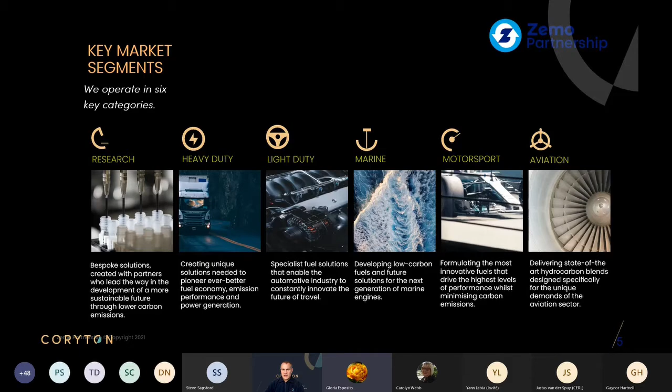So why we're here today? We're looking at understanding how the industry can cope with the move away from fossil fuels into a more sustainable future. There are a number of pathways to sustainable fuels that Coryton has been looking at, and indeed a lot of the rest of the industry has been looking at as well. These transition from typical biofuels that are very common in road fuels today, such as FAMEs, or rapeseed and soya and diesel, and alcohols such as ethanol. There are methanol fuels available in certain markets as well. But what we're looking to do is push the boundaries of what we can achieve within the market, because alcohol-based fuels, FAME-based fuels are not considered to be drop-in fuels. And they also give us little scope for improving or utilising other feedstocks to help complement the liquid fuels that are in the market and to decarbonise them.

With that, we've been looking at a number of different technologies, and specifically we've been looking at ethanol to gasoline technologies and methanol to gasoline technologies. The screen that you can see now gives you a bit of an indication of where they sit within the mix of different fuel types that are available. If we go back to typical FAMEs and ethanols, these are sitting down in the typical biofuel stream. As we move further up the scale, we go into a more advanced biofuel route, all the way through to e-fuels. And out of those, what we're looking to achieve is to actually change the structure of the feedstocks to one that is more common and one that can be considered to be a true drop-in fuel. Can we go to the next slide, please?

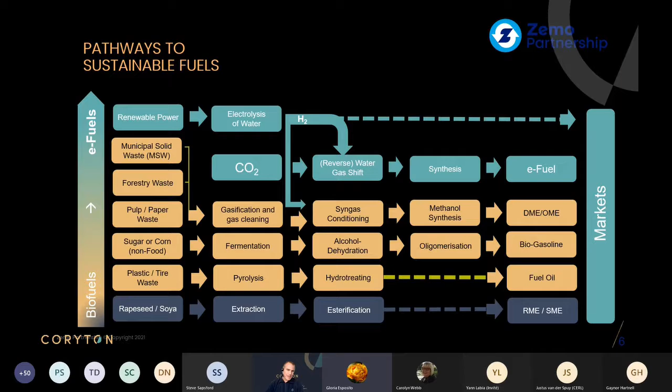So as I said, there's a number of technologies that we've been looking at. We can break these down over sort of the gasoline and diesel ranges. I'm obviously going to concentrate on gasoline, but we've got biogasoline from the ethanol to gasoline process.

We've seen this as being particularly viable at the moment. There is a particularly large capability within the market of supply, and it's also relatively energy efficient - the process involved doesn't form a lot of energy, it doesn't require a lot of energy to run it, and I'll go on to that in a moment.

We've also got biogasoline from the methanol to gasoline process, and you will have heard this within the industry for a number of years - a technology that was designed by ExxonMobil. Again, it has a very similar sort of technology to ethanol to gasoline in terms of its process, although the technicalities behind that are very much different, and they do produce very different types of fuels.

Obviously, going through, we've got biogasolines or biojets. These can be sort of produced from pyrolysis fuels. Again, these are only in an R&D stage, and obviously we've got the power to chemicals.

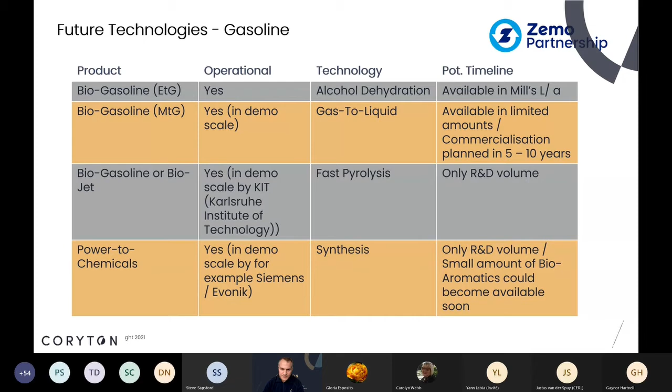Now there's a bit of a mix here with the biogasoline on the MTG route, because these MTG fuels are normally considered to be a true definition of what an e-fuel is - i.e. it's a fuel that is produced using carbon dioxide, hydrogen and renewable electricity to power the first part of the process there. Can we just go on to the next slide, please?

There is obviously diesels as well, typical HVOs that are in large-scale production at the moment. There are other advanced biodiesels that we've been working on, and you've got these sort of circular economy fuels as well, which are utilising wastes such as maybe municipal wastes from plastics, from rubbers. These are a lot more energy intensive, and there is also a discussion around how they sit within the matrix of looking at their sustainable credentials.

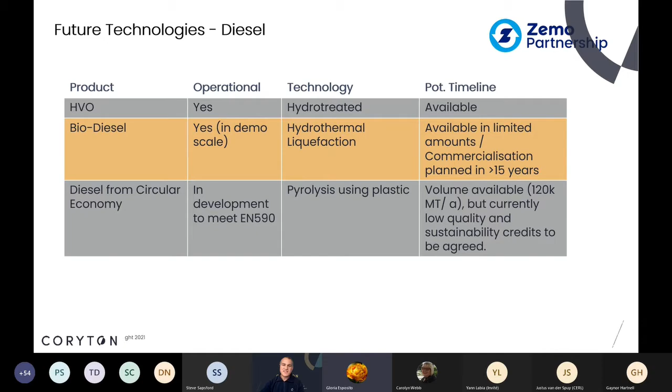So if we can just go on to the next slide, please. Just to give you some of the examples of some gasoline products that we've been looking at recently for a number of different applications - we've sort of been concentrating on typical retail type fuels, but also motorsport fuels as well, and looking to help bring the market, or bring those into a market where they can be tested and effectively sort of signed off.

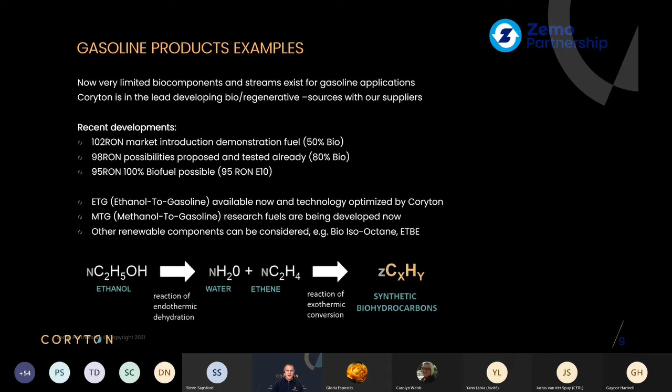The idea being is that we really want to have a look at understanding, are they really a true drop-in fuel, or are they something that's more aligned to a biofuel that we've seen in the past. So we just go on to the next slide, please.

So just to talk to you around the ethanol to gasoline process specifically that we're looking into. The main process here that we want to get to is obviously we're looking to convert biomass into ethanol. And in this particular scenario, looking at ETG, we're wanting to utilise second generation ethanol. These can be utilising feedstocks such as forestry waste, agricultural residues or straws, and these will go through a very typical hydrolysis and fermentation process using the various catalysts and enzymes, as you would normally to produce any other alcohol.

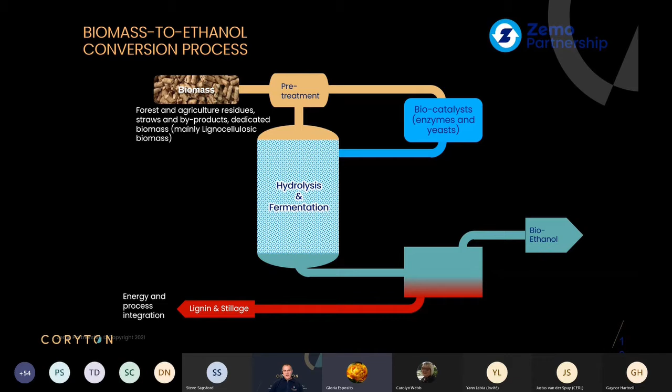If you can just go on to the next slide. When the ethanol is eventually produced, it's then going into these proprietary technologies, the actual ethanol to gasoline conversion technologies. Now, ethanol to gasoline technology, the good thing about this process is that it produces an exothermic reaction, and this in itself helps to power the entire process through.

And what you're looking to do is split off the water and hydrogen molecules, and you're producing a syngas that's being put back in, that's being reformed again, and then it's going through to a final distillation process.

Much like what we see within the fossil industry, there are offcuts of the refining processes that you need to think of and find homes for. And that's a good thing, because it means we can utilise these offcuts or other fractions in other industries, whether it's carrier fluids where additives are used.

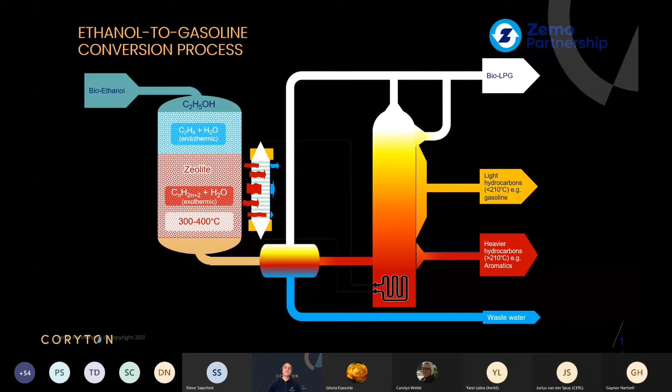So ethanol to gasoline is not the only process we've looked at and worked with various industries. You've also got biomethanol to gasoline.

The methanol stage of this is really where you're terming the e-fuel stage, because you're taking CO2 out of the atmosphere and combining it with hydrogen to form a biomethanol. Again, much like the ethanol to gasoline process, this is going back into a process using a zeolite catalyst.

But the technologies and the heats used, and the process sitting behind this, produce a very different type of product for us. It's actually a much lighter gasoline, boiling in the sort of 250 to 300 degrees C range.

But likewise, then going through into a distillation column, where we can cut off the various different types of products. We found that through this process, we're actually getting cuts that are a lot lighter, with a lot less aromatics, giving us fuels that are potentially much more usable in the future.

Now, the problem with these processes, particularly the methanol to gasoline process, is that it's quite an energy intensive process right at the beginning stage. Although the latter stage, much like the ethanol to gasoline process, is exothermic and therefore producing a lot of its own energy to power the process, the beginning stage to produce the biomethanol does require external energy, and ideally that should be a renewable source.

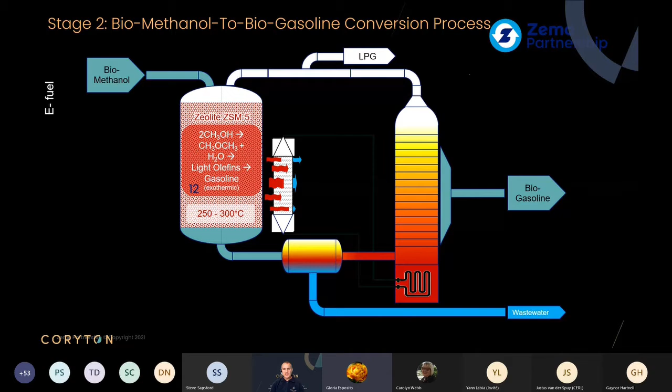There are facilities around the globe that are taking CO2, or carbon capture, whether from atmosphere or direct feed from industry, and powering these processes through hydro, wind or solar to produce this biomethanol. At that stage, we can consider them to be a true e-fuel with very good greenhouse gas savings.

Coryton has produced a number of fuels because we've wanted to look at these fuels in real world applications as well as on the test benches. We've also done our own fleet studies utilising our own staff vehicles. As you can see from the slide, we've looked at trying to concentrate on

EN228, or typically EN228 type fuels, to understand what does that mean, what does it give us in terms of its greenhouse gas savings, because that's ultimately what we're trying to achieve here. As you can see, with these types of fuels, you can achieve up to and beyond 80% greenhouse gas savings based on the RED II directive.

This is utilising a mix of the biogasolines, but also the straight alcohol contents as well. That can increase as you move from an E5 all the way up to an E10, which is quite pertinent, bearing in mind EN228, certainly in the UK, is going to move to an E10 from September onwards.

So what are the advantages and disadvantages of these types of fuels? Well, firstly, it's a true drop-in fuel. Looking at the characteristics of these fuels, one thing that we wanted to move or educate the industry on from these technologies is that they are not alcohols in their own right. They're not alcohols as you're used to seeing them.

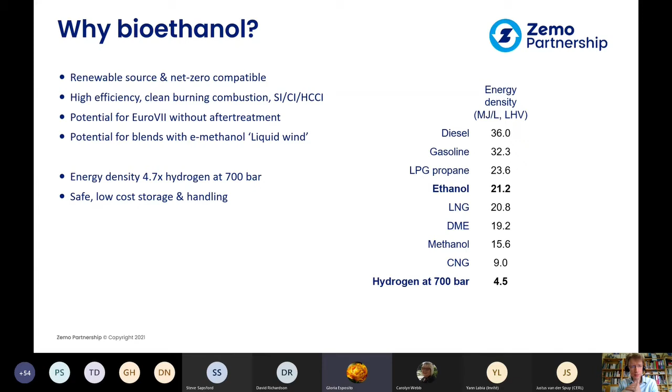It's also worth noting that today over 100 billion litres of bioethanol are produced globally, most of that by the US and Brazil, with other countries also ramping up their production. Despite this, over the last decade there's really no apparent link between bioethanol production growth and food prices. So for all of those reasons, this is a really interesting future renewable fuel.

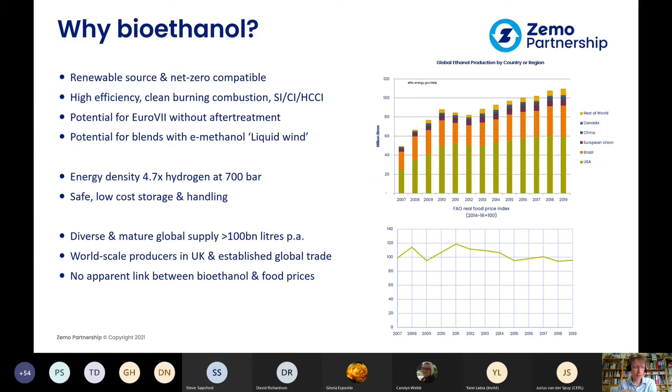Now the problem in heavy-duty vehicles is this. We're looking ahead to 2050, trying to decarbonize all sectors, including the heavy-duty vehicle fleet. By 2050, all the trucks rolling around need to be net zero, running on electrical power and renewable fuels only. But that poses a problem because trucks stick around in the fleet for well over a decade. So if we're going to get to a net zero fleet by 2050, most vehicles sold in 2040 must be fossil free, meaning we've got to start introducing these fossil-free capable trucks by 2030.

The trouble is the incentives and the practicality just aren't there. The joint statement made in December last year by leading European truck companies tells a story I'm very familiar with, wearing my Cockerill hat: those who operate trucks will not invest in zero emission technologies if there's no straightforward and affordable way to run, refuel and recharge them. When we look at the offerings today for our fleet, where we could substitute in battery electric tractor units, the impact on payload, productivity and upfront cost means there's just no way we can put those vehicles into our fleet and expect to continue as a transport operator.

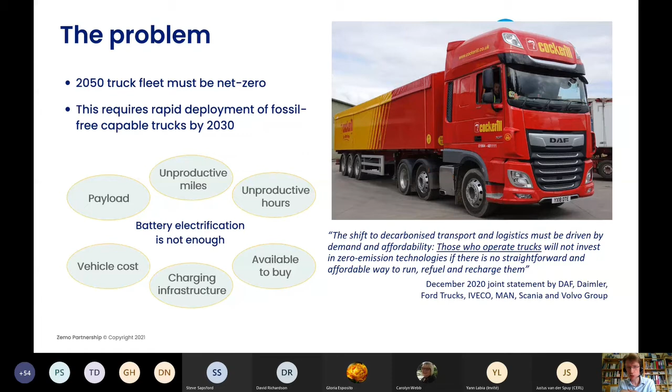So here's a solution, arguably a fairly self-serving one, but this is what Libertine's proposition could enable. Our technology, a platform technology for opposed free piston engines, will enable the creation of a modular, high efficiency range extender that can be optimized for 100% renewable alcohol fuels, compatible with existing fuels, and used on board series hybrid heavy-duty vehicles, so that for those legs and journeys where recharging isn't convenient, the truck can continue to operate productively.

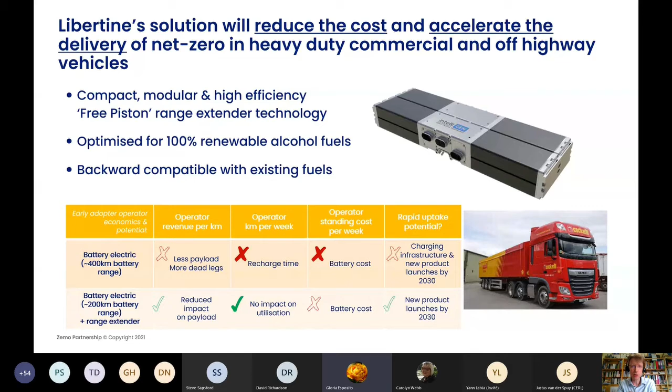By marrying together the best of what's available in battery technology and recharging with renewable alcohol fuels for those other times, we think we can get to a commercially viable product during the course of this decade. This solution is going to reduce costs and accelerate the delivery of net zero in heavy duty commercial and off-highway vehicles.

There might be an animation here. Let's see if this works. There we go.

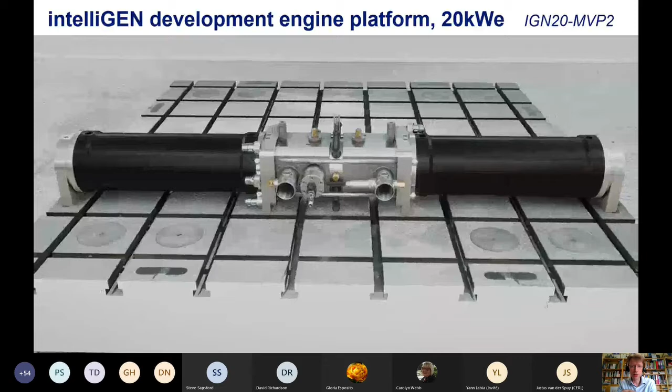Apologies if it's a bit jumpy. This just shows an animation through a development engine which has been running on the test bench with MAHLE Powertrain in December, and we're doing further work with MAHLE this year. You can see in the central combustion chamber here, this is an opposed piston engine. There are plenty of opposed piston engines out there. The difference in this case is we don't have crankshafts.

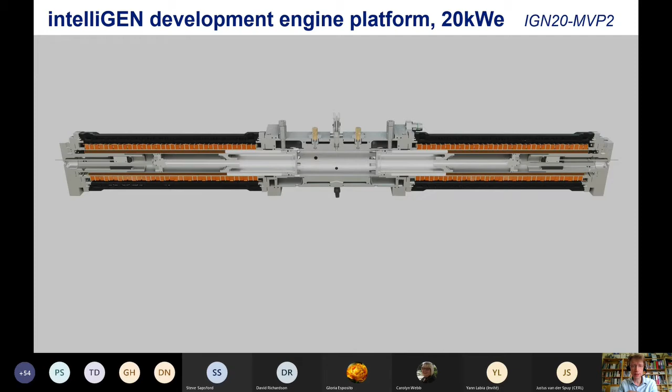We have these two software-controlled linear electrical machines on either side, and that means the combustion event can be controlled, the compression ratio can be controlled and varied in every stroke to make better use of renewable fuels like bioethanol, which would otherwise have challenges when it comes to, for example, cold start. Next slide, please.

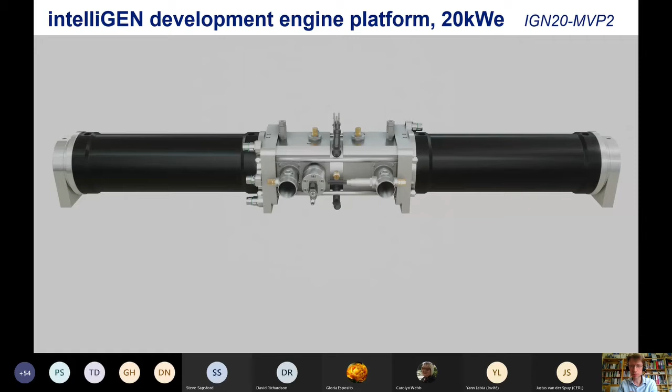So the work we did with MAHLE last year showed a proof of concept with this running on hydrous ethanol in the test cell. This was running on 90% ethanol, 10% water. We chose that blend, incidentally, because from a bioethanol producer's perspective, getting rid of the last 10% of water is energetically and operationally quite expensive. And as far as the engine is concerned, it's just not necessary. Unless you're going to blend it away with gasoline, there is no harm at all in the last 10% of water being left in. So we put this onto the test bench with MAHLE.

We demonstrated that we can motor and combust with a constant compression ratio just with software control, no need for crankshafts. And then we showed that by sliding up the compression ratio, we could achieve cold start performance much better than with a constant compression ratio. So in this proof of concept work, we've essentially shown that engines using this platform are feasible. And looking ahead, we're looking with interest at how this could be applied on board heavy duty vehicles.

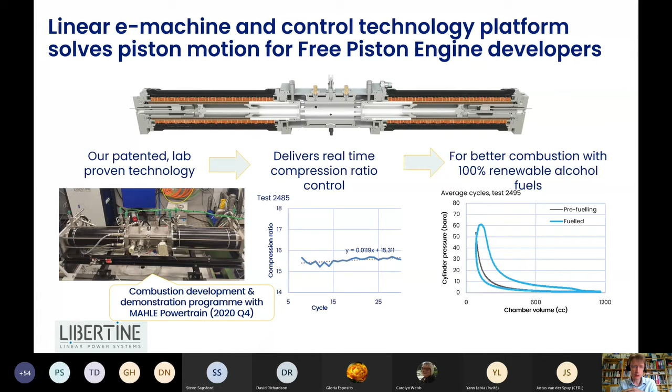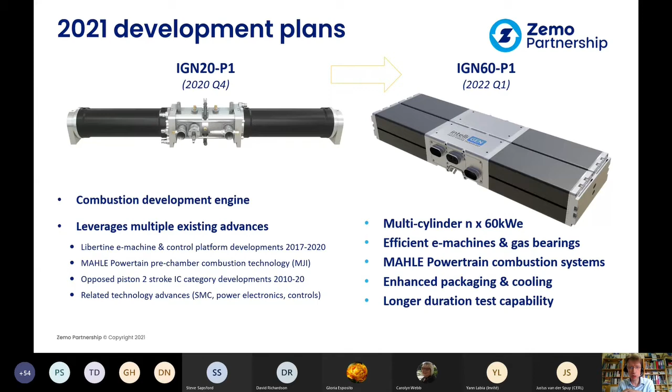Next slide, please. Now, we've just announced some further funding in 2021, which is going to take the test bench engine on the left and turn it into a multi-cylinder engine, not dissimilar to the one you can see on the right. This new package is going to show much higher efficiency electrical machines running on gas bearings with some proprietary combustion systems that MAHLE Powertrain are bringing on board. We'll have better cooling, better packaging, and we'll probably be running for up to an hour, which takes us much closer to a product that we could then put into a vehicle demonstration.

Next slide, please. Now, when we're looking at vehicle demonstration, one of the things which is quite interesting is the potential as a sort of beachhead market to look at integrating onboard power generation into cool chain trailers. So in our fleet, we have some cool chain trailers like this. On the front end of the trailers, on the bulkhead, there's already a small diesel engine coupled to a refrigeration system, and the potential is there. The form factor is really very suitable.

The potential is there for us to swap out that fairly dirty diesel engine and put in an opposed free piston 2-cylinder engine that could generate 120 kilowatts of electrical power on demand using bioethanol, and then send that DC power to an electric tractor unit on those occasions when the tractor unit's onboard battery is depleted. So this is where we're looking ahead to a concept of how the technology might first be used in a vehicle demonstration project.

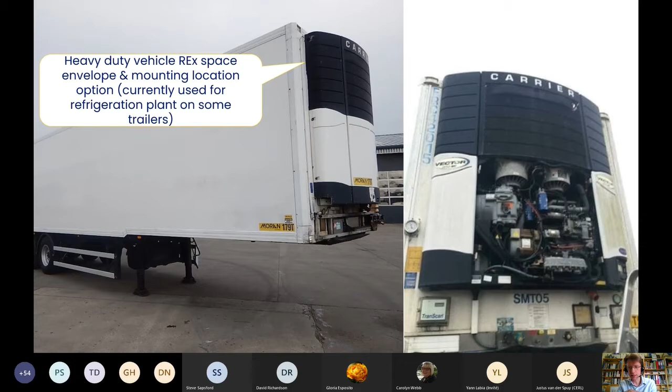Next slide, please. This sort of module, though, has much wider applicability across a wide range of heavy-duty on-highway and off-highway vehicles. So although we might start putting this into a trailer-mounted range extender, obviously a tractor unit-mounted range extender has much broader use. And we can also look at the possibility of putting this into fixed wheelbase light and medium duty commercial vehicles, as well as off-highway applications like tractors, construction, forestry and mining.

So that just gives you a fairly rapid run through of some of the areas that we see most interesting for alcohol fuels in heavy duty vehicles, and how Libertine's technology hopefully is going to provide the missing link between the excitement that I have and the prospects that I see for alcohol fuels in heavy-duty vehicles, and the challenges that heavy-duty powertrains have today in moving to fully net zero capable future solutions.

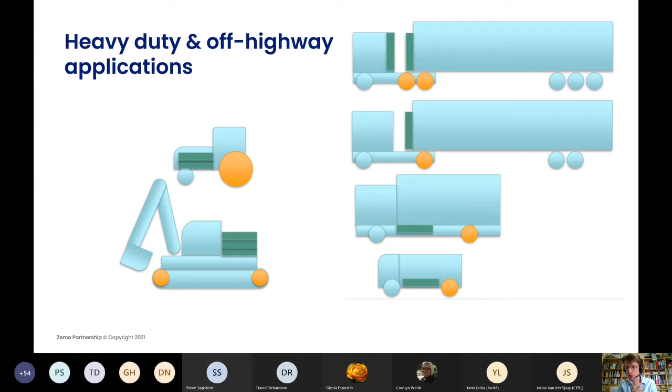Thanks, Sam. Excellent. A quick run through there of the application of bioethanol.

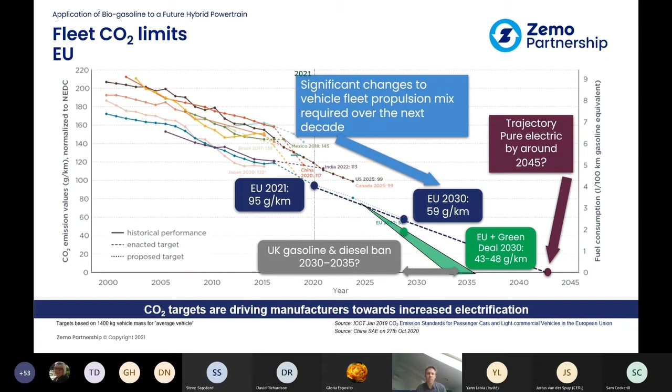If we're going to achieve this, we need a really significant change in the vehicle fleet propulsion mix over the next decade. New legislation's continually evolving and changing, so the UK gasoline and diesel ban proposal from 2030 and the EU Green Deal for 2030 to reduce tailpipe CO2 emissions from 59 down to 43 to 48, all accelerating these trends. These CO2 targets are obviously driving manufacturers towards increased electrification, whether that's through pure EVs or the use of plug-in hybrid electric vehicles.

Next slide, please. A couple of years ago, MAHLE started looking at what an optimum concept for a plug-in hybrid electric vehicle might be, and we developed our modular hybrid powertrain concept, which is a plug-in hybrid driveline that's optimized for the requirements of next generation passenger vehicles. It features an engine, traction motor, generator and transmission, and a dedicated hybrid engine, all fully integrated into one unit.

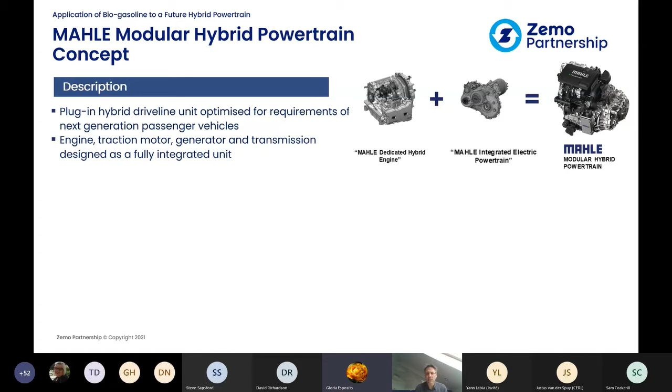Next slide, please. One of the key features of the modular hybrid powertrain is actually that the full dynamic performance of the vehicle is provided by the electric powertrain. That differs from a lot of current plug-in hybrid solutions available on the market, which only offer a small proportion of the vehicle's performance using the electrical system. The system's combined with a plug-in solution and a battery pack, which gives us 80 to 150 kilometres electric-only range, so the vehicle can operate as a full EV over that limited range.

We then have a dedicated hybrid engine, which is optimised specifically for the application. Because that engine is now only required to produce the charge sustaining power, the peak power and peak torque of the engine and the operating range it operates over can be significantly reduced. That means we can optimise the engine for operating in that small window and boost efficiency. It also means that the control of the engine is now independent from driver demand, giving us the ability to much more accurately control the engine. We avoid sudden transient requirements, harsh accelerations of the engine and load shifts, allowing us to do improved emissions control.

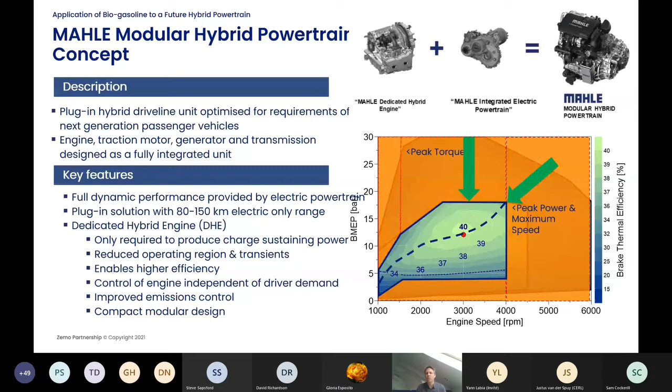Due to the fact that we have the battery capability and we know we can predict when we need to start the engine, there are then opportunities to precondition the engine by warming it using waste heat from the electrical system, or preconditioning the after-treatment prior to starting, all to help minimise emissions. Next slide, please.

So in terms of the layout of the modular powertrain, it's got 3 different modes of operation that we can run in. It can run as a pure battery electric vehicle with the dedicated hybrid engine off and the transmission in neutral. Under low load conditions, we can run as a series hybrid, where the dedicated hybrid engine acts as a range extender and provides charge to the vehicle. But under high load and high speed conditions, we can also operate as a parallel hybrid, whereby the hybrid engine provides direct drive to the wheels, which is much more efficient than converting mechanical engine energy into electrical energy, passing it through the battery system and back to the motor.

The system is scalable, so we can configure it for a range of different configurations, from a compact car with a simple 2-cylinder engine and a 1-speed transmission, through to a 2-cylinder engine for, say, a crossover vehicle, or a 3-cylinder engine combined with a 4-speed transmission for, say, a large SUV. That provides the normal towing capability and the long range capability expected of these kinds of cars, without the need for a very large battery pack.

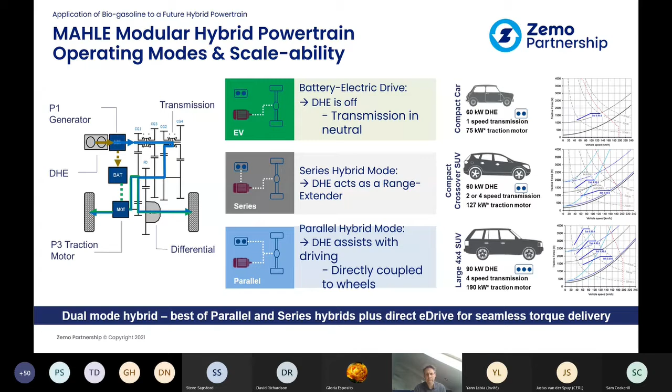So when we started this study a couple of years ago, we wanted to look at what the optimum PHEV battery pack size would be, so we conducted some life cycle study. Obviously, life cycle studies are complex and rapidly evolving, with lots of different assumptions, and you can take values from different reports which can give quite different answers. For this study, we looked at the plug-in hybrid case and what the optimum battery size would be, based on a 1400 kilogram vehicle with a conventional engine producing 120 grams per kilometre of CO2, which was typical in the market a couple of years ago.

We calculated the utility factors for the tailpipe weighted CO2 based on the R101 regulations, and considered well-to-tank contributions as well. We used a grid CO2 intensity mix of 296, which was typical around the time of the study, and a battery embedded CO2 value of 95 grams, taken from the recent Polestar study.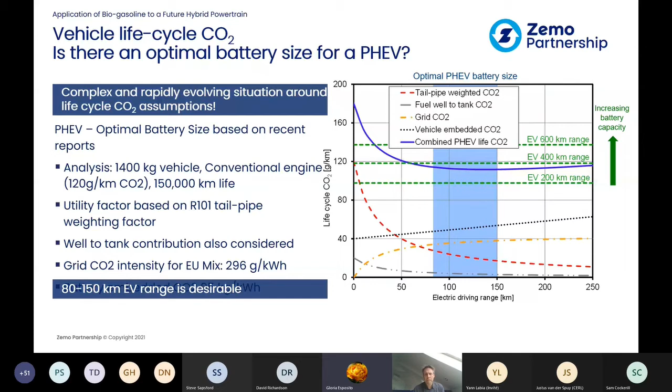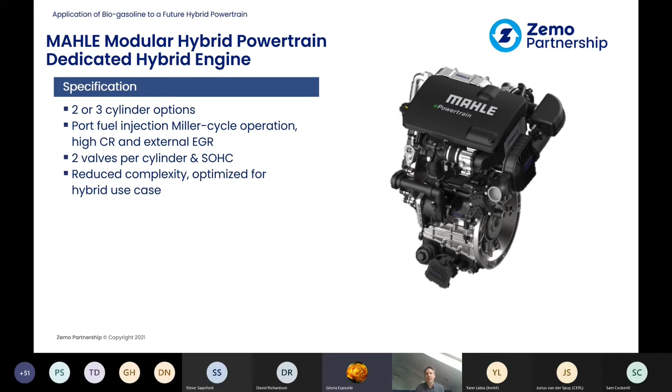The dedicated hybrid engine that we've used is a 2 or 3 cylinder engine with a low technology pack featuring Miller cycle, high compression ratio, and external EGR. Because we've been able to reduce the operation of the engine, we can simplify it and reduce its complexity.

The engine features our MAHLE jet ignition system, a combustion technology which helps reduce burn durations and improve knock capability. This enables us to run higher compression ratios and achieve very high efficiency at a low cost. With this engine technology, we're achieving over 40% brake thermal efficiency.

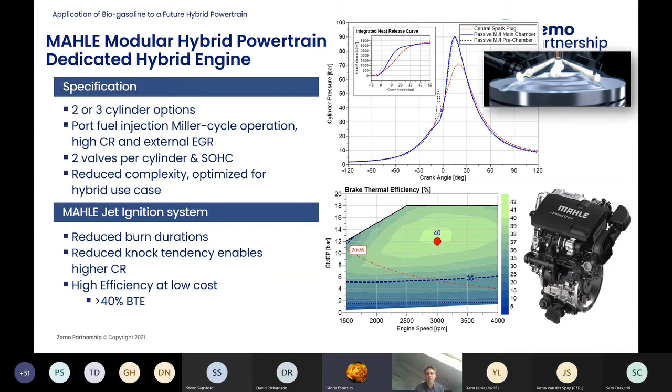Now we get onto the biogasoline testing. This testing was performed using the 3-cylinder modular powertrain development engine described in the previous slides. Using that engine, we wanted to assess the impact of running different biogasoline blends on engine performance. We tested 5 Coryton fuels, which David introduced earlier, including 2 different 95 RON fuels, both compliant with EN 228 but covering a range of different properties. We compared these against 3 different biogasoline blends, which offer between an 80 and 65% greenhouse gas saving.

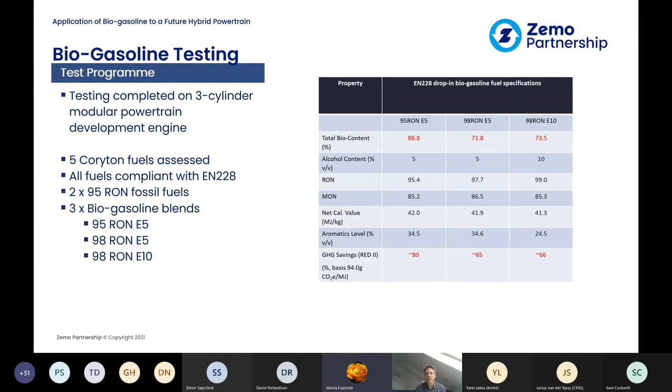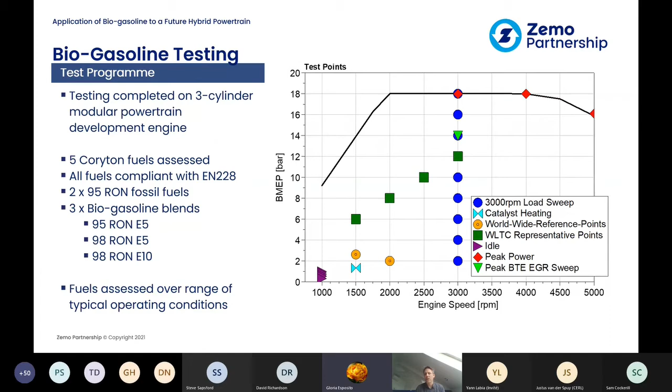These fuels were assessed over a whole range of different operating conditions, covering all normal operations, from light load, whole map operation, full load, and a variety of typical conditions.

So we looked at the typical combustion metrics for the biogasolines, and we collated the data from all of those test points and looked at its effect on brake thermal efficiency, combustion duration, knock resistance and combustion stability.

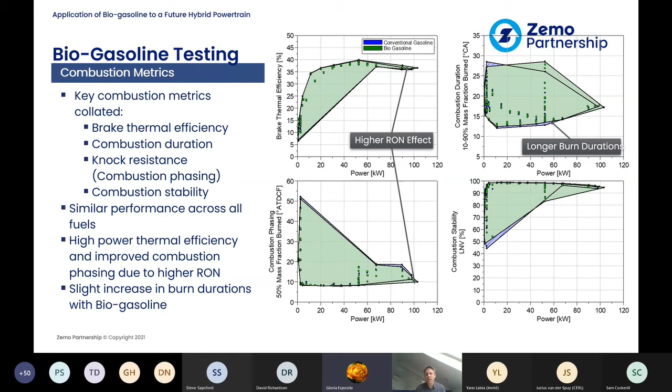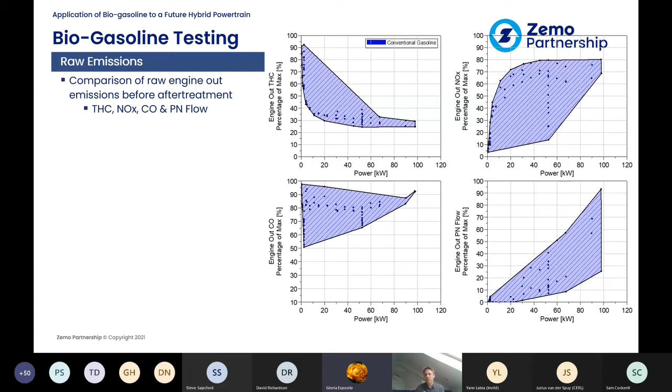If we then look at the raw engine out emissions over the same suite of tests, looking at hydrocarbons, NOx, CO and PN flow, we see the results here for the conventional gasoline fuels.

We're planning further testing to look at alternative blends and to quantify the effect of these emission differences on tailpipe emissions in the future.

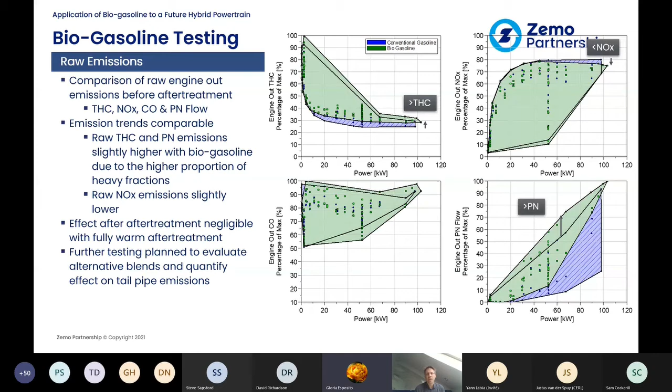So if we go back to our original charts, we see what effect the 80% reduction in tailpipe greenhouse gases based on the 95 RON biogasoline would make for a PHEV with an 18 kilowatt hour battery and 100 kilometre range. What we see is a reduction, designated by the green dot, which takes us down, accounting for that greenhouse gas saving. If we then have a dedicated hybrid engine with full recuperation, we can generate low life cycle CO2 of around 80 grams per kilometre.

That translates to tailpipe CO2 emissions using the weighting factor in the region of 4 to 20 grams per kilometre, depending on the biogasoline content, for a product that has the potential for use in sort of the 2025 type time frame as a new product. So it's well ahead of the trajectory of the target for achieving zero tailpipe for 2050.

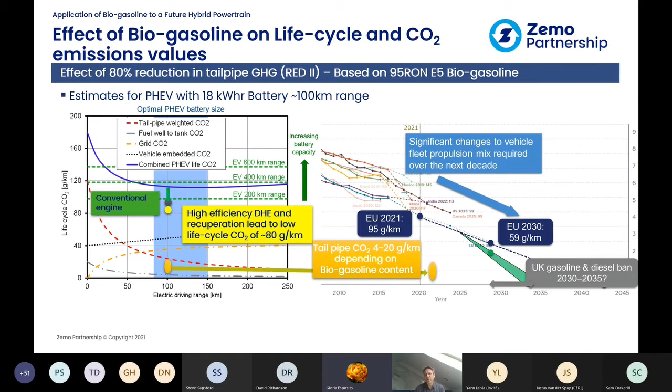So in summary, the biogasolines that we've tested exhibit near identical combustion properties to regular gasoline, and sustainable biogasoline offers the potential as a drop-in solution to help with CO2 reduction for the existing fleet with reduced life cycle CO2 contributions.

And for heavy-duty applications particularly, plug-in hybridisation is an appropriate technology which offers a combination of local emissions-free driving but long-range capability with only the requirement for a small battery. So a PHEV enables the optimised use of both battery and renewable fuel resources.

And the MAHLE modular hybrid powertrain is an example of a future powertrain that could be scalable and cost optimised, providing high efficiency use of these fuels as we transition from current infrastructure to a net zero transport approach. I think it's a complementary technology, and what we've hopefully shown with some of this testing is that the biogasolines have the potential to offer comparable performance as a drop-in solution and can provide a contribution to reducing that overall fleet CO2 in the coming years.

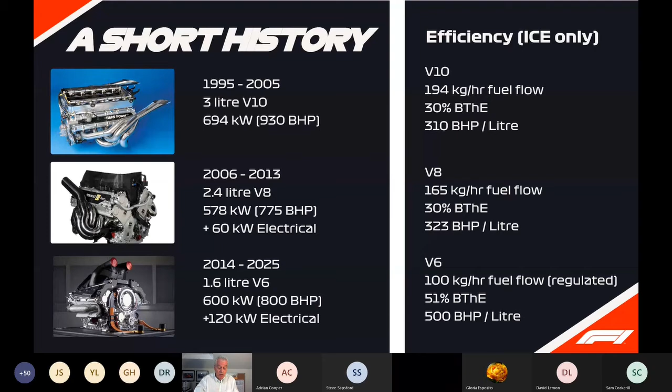Then we moved on in 2014 to the current turbocharged V6, which really brought a new philosophy to Formula One. For many years, designers had been all about getting as much air as possible into the engine and then just adding the required fuel. In 2014, we brought in a fuel flow limitation, around half of that used on the V10s at maximum power, and this brought a whole new philosophy of lean burn, as well as much higher levels of hybridization.

Sustainability has been a bit of an untold story in Formula One's 70-year history, and it has now resulted in what we think is the world's most efficient hybrid engine. Many of the innovations we've introduced have had a multiplier effect, improving efficiency across a wide range of industries.

Formula One technology has already significantly benefited road cars with aerodynamic innovations, safety developments, the energy recovery system itself, and composite materials. Lots of things from Formula One have been adopted both by road cars and other industries.

We think that the hybrid engine combined with advanced sustainable fuels plays a role in decarbonising the global transport sector. The Formula One hybrid at the moment is the most efficient small engine on the planet. It delivers more power using less fuel than any car engine, and of course less fuel means less CO2.

We must remember that over 1 billion of the 1.1 billion vehicles in the world are powered by ICEs right now. So we think we can have more impact on the wider decarbonisation of the automotive industry through a sustainably fueled hybrid power unit. We believe that the solution to the environmental situation regarding mobility is going to be many parallel paths, not just one.

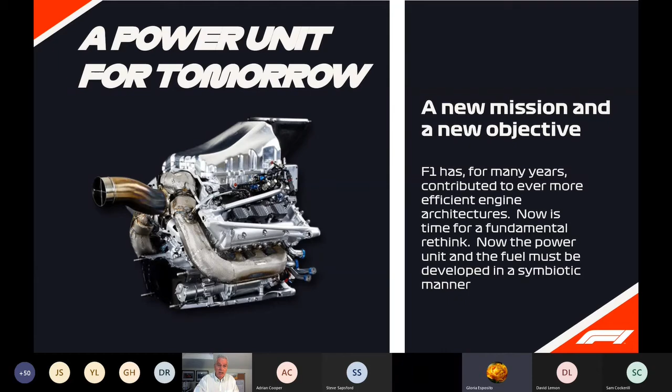As we consider our new regulations, we need to accept that energy is the new currency, not just of Formula One, but of society as a whole. We need to move to a formula that rewards energy efficiency even more than it does now, while keeping CO2 and other emissions extremely low. We need to embrace life cycle analysis, and help the public understand its implications, rather than the slightly illogical current focus solely on exhaust gas emissions.

Perhaps we'll move to an energy-based formula. At the moment, consumers pay for electricity in kilowatt hours, and they use gas with a conversion from cubic meters to kilowatt hours. So we wonder if we can get the same message across in motorsport.

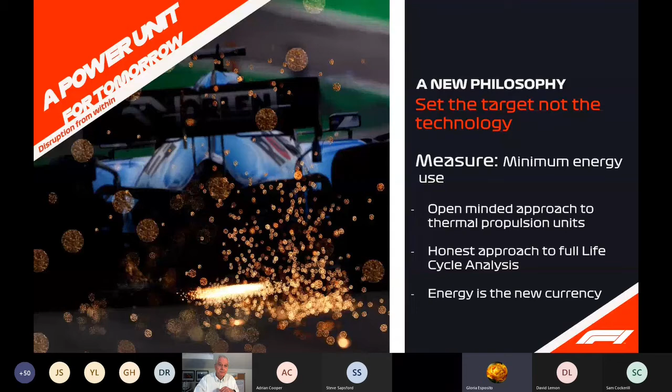We want to promote the technology. We don't want to be talking about sound. We want to be talking about efficiency. We want to talk about CO2 reduction. We want to call our cars plug-in hybrids, and we want to show that they are plug-in hybrids.

I think motorsport is very expert at moving technology through from around TRL3 to TRL8. We've done it many times before, and I think it's a core competence of our business. However, we've not always been very good at telling the world about it, and the veil of secrecy that surrounds competition has not been very helpful in this respect. But Formula One now is promoted by a media company rather than a venture capital company, so we have an opportunity to change this.

As we consider new regulations, we need to accept that energy is the new currency of everyone. And that means we need to look at where we're going with our fuels. Now, our current regulations require that around 5.75% of our fuel comes from a bio source. We don't add to that at all, so there's no requirement that it's second generation, and there are no further stipulations. Formula One works on the fuel flow formula with a maximum flow rate of 100 kilograms an hour, and the requirement really is to use this allowance to add the highest energy content.

Consequently, everyone is using a synthetic isooctane, which is actually all coming from a single source, and it's doing very little to advance the science.

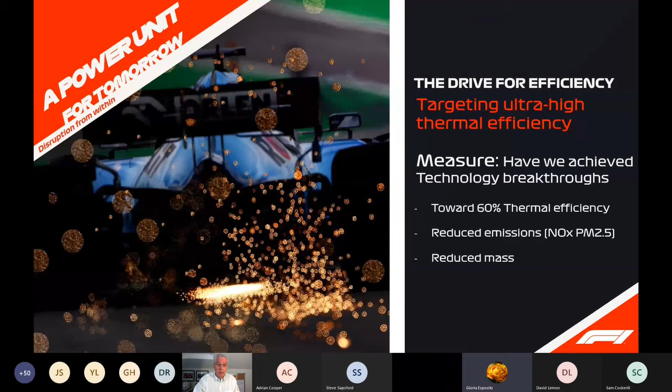Also, hybrids are heavy, and racing cars shouldn't be heavy. So we're looking at how we can reduce the power unit mass. We're considering a small, maybe 4-cylinder engine, for example, and thinking very carefully about how we size the battery.

So what might our next generation power unit look like? Well, the simple answer is I don't really know yet, but I do know that if we want introduction in 2025, we need to have a pretty good idea by the middle of this year. So we're doing a lot of modelling at the moment.

We need to exploit the ability to use fuels with design characteristics that are pertinent to our specific needs, so a co-optimization process. There's no reason to only consider a single fuel source. I think octane on demand could be a useful technology, even though in our case the drivers might make a lot of demands. One of the success stories of the current engine is exhaust heat recovery at high loads.

There's more that can be done here, and whether it's an extension of the current methodology, technologies such as the organic Rankine cycle. We need to consider much more hybrid integration, and I think Formula One needs to be a parallel hybrid for sporting reasons, but we do need to consider things like electric pit lanes, so we're showing the public that we have a true hybrid.

The gas exchange needs further consideration. We've learned a lot from this engine, but there are certainly limitations that we need to overcome.

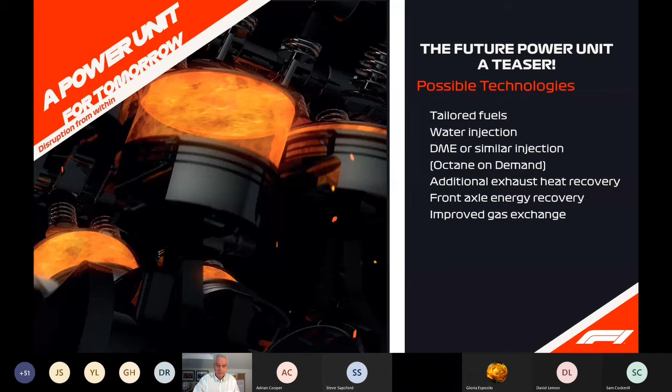One of the challenges we need to consider is that part of light load conditions are not of much interest to us. Now, I'm not saying that torque demand is binary. Drivability and smooth delivery of torque is vital, not just to vehicle handling, but also to tyre life and performance.

So we need to consider how we integrate better our architectures, particularly with regard to integrating the electrical machines. I think time is not on our side for radical change to the internal combustion engine, but well-chosen cutting-edge technologies will serve us well. Some of the technologies are almost a given, such as HCCI and extremely high injection pressures, but the whole area of reduction of harmful engine emissions and after treatment is still very open to debate.

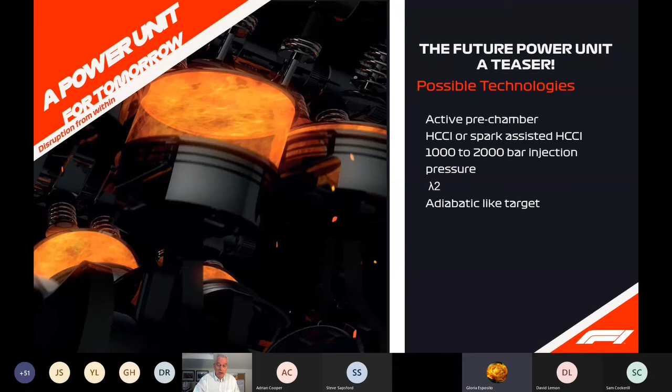Now, moving to the sustainable fuels, we set a target to suppliers, relatively simple, relatively general, and we wanted them to produce some sample fuels that we could give to the engine manufacturers to test. And that fuel is now being produced and it's gone to the engine manufacturers.

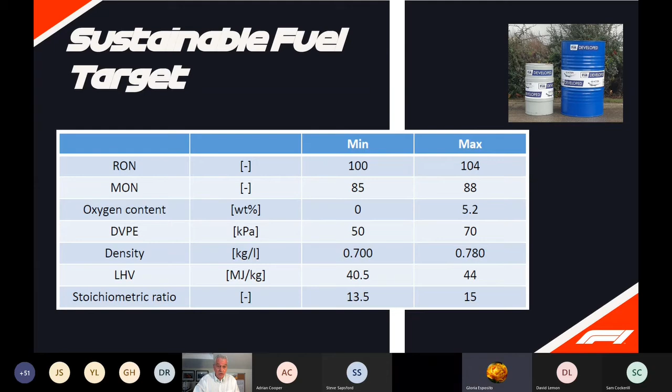What we actually achieved was not far from what we asked for. The LHV was rather low and the performance was, of course, down a little bit, but it has at least shown that there is a starting point.

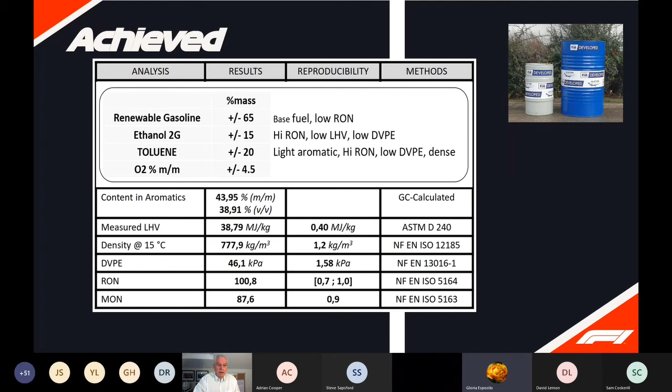So now we're really looking at the pathways of where we can go in the future. And we have a matrix of opportunities, bearing in mind that we need to have somewhere around 750,000 litres of this fuel available in 2025 and sufficient quantities for extensive testing in 2024.

I think that the e-MTG and e-gasoline have significant potential to be used as a base fuel, maybe around an 80% blend or something like that, but we would need further formulation to improve the RON. The e-Fischer-Tropsch naphtha can be upgraded as a stream or used for producing specifics such as cycloalkanes with desired sort of racing gasoline properties. But again, we need further process investigation on this.

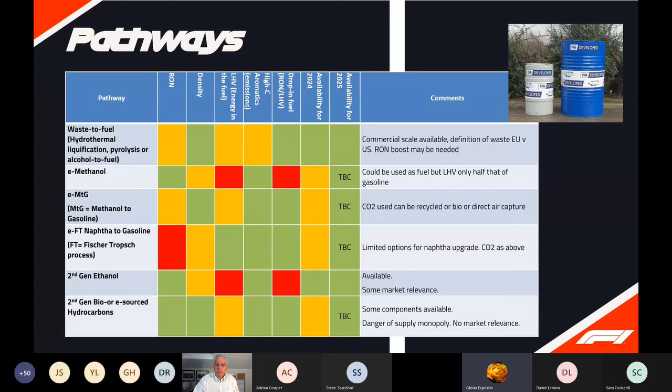The format and the operating parameters of the 2025 power unit will ultimately dictate the optimum fuel, but I think the following considerations will be taken into account. Unfortunately, the LHV and the RON values are typically inversely related, and breaking this relationship is energetically quite expensive. So we'll probably put in a sensible RON limit of around 100, 102, and use advanced sustainable fuels that have a positive impact on the cost of the engine.

We have to consider the energy balance. This is one of the most optimistic that I've ever seen, and we can see that there's still a 3-to-1 ratio on this. But we are confident that the technology demonstrator is something worth doing and something that Formula One can certainly provide.

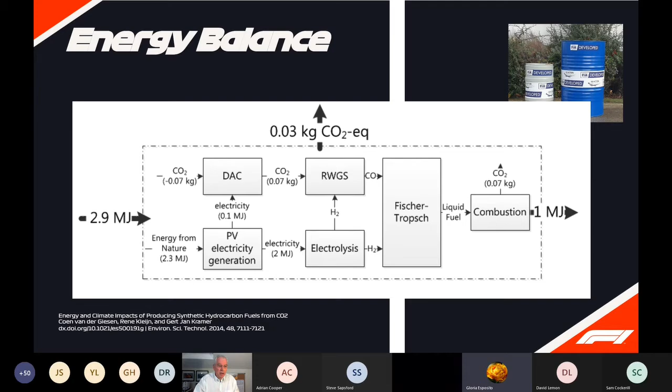Just going to finish off with a little movie that shows some of the work we've been doing.

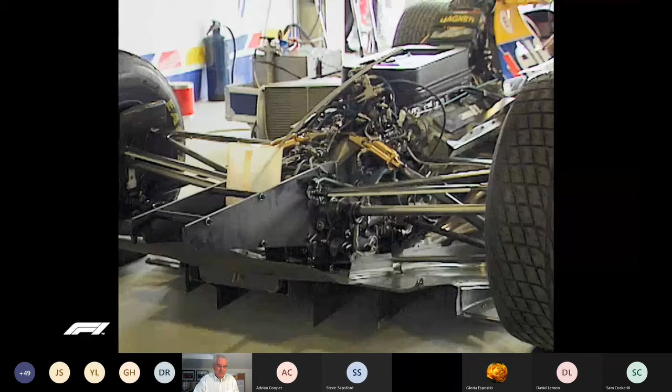Doesn't seem like it's coming through with any sound, which is a shame. Without the sound, there's not quite much impact to it. So maybe we'll just move on to the next slide to finish off. It's a shame, I could hear it.

Our mission now is not just to unleash the greatest racing spectacle on the planet, but the greatest sustainable racing spectacle on the planet. And as the video pointed out, we've got to re-engineer racing. The problem may have been pointed out by scientists, but only engineers, as ever, will find the solutions. In Formula One, we not only need to be part of the solution, but we actually want to be part of it. So with that, I hope you've understood a little bit about what we're doing in Formula One for the future. Thank you.